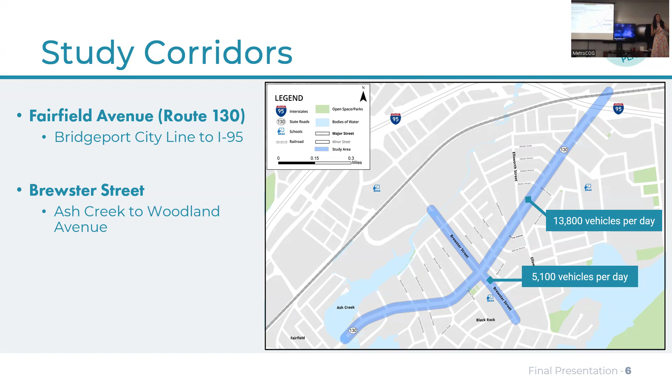So, community feedback: we had an online pin drop survey. I hope all of you had a chance to look at it. We got nearly 500 responses on the pin drop survey. Then at our second public engagement — actually our very first meeting — we took more comments and put them into the pin drop, which got us to 500 comments. But at our first official public meeting, at the very end of the slide deck, we had an activity with 6 boards up, different themes, and we gave you dots and said, go find your highest priorities.

We had 6 key concerns: pedestrian safety, managing speed, on-street parking conflicts, improving bus stops, dangerous turning to and from, and bicycle safety. So you'll notice none of those were like, let's just get you all to drive down this corridor faster. That was not an option. And that's good, because that's not what's going to happen.

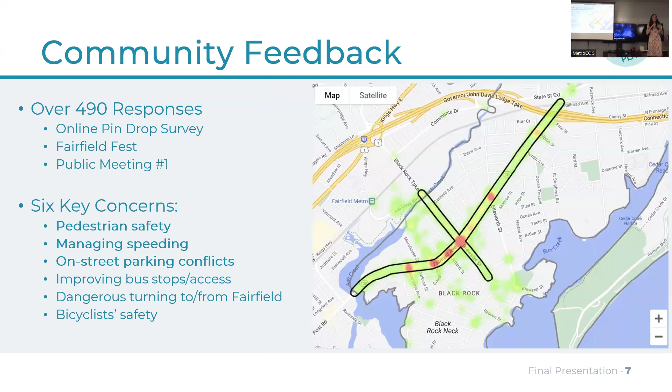The top 3, sorry, just really quick — the top 3 were pedestrian safety, managing speeds, and on-street parking conflicts. So those were the key focus going into these concepts.

Crash frequency, you know better than I do — this is just data, the crash frequency and the near misses that are not captured by this crash frequency. If the crash didn't happen, but it almost happened, it's not in this data. We know the corridor has had its safety problems in the past. There are 3 very high crash intersections — Brewster Street, Ellsworth, and Orland and Albion — which were also focus intersections for these concept plans.

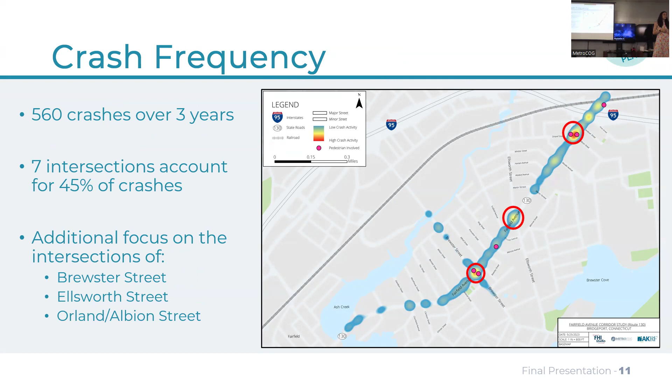So we kind of ended on this at the last meeting — the preliminary concepts and where they might fit, because we had, if you remember, 6 different cross sections, but we showed one, for instance, that didn't have on-street parking. What do you mean we're going to take out on-street parking? The goal was to take out on-street parking where it is least utilized or not utilized.

As we've received feedback that you need parking back in certain sections or it needs to modify, we've been trying to do that. I just heard of another section tonight, down by the bars, that may need that on-street parking that's currently not shown. Again, this is a plan that will be documented into the study that this needs to be accounted for. Potentially overnight parking demand needs to be accounted for.

The goal was never to remove parking everywhere. It was to remove parking where it's unsafe, right at the corners of intersections, and also where it's not used because the land use doesn't need on-street parking, or near Albion, where it's not even a parking lane, just a wide shoulder that encourages speeding. So taking that out, what can we do with that space?

That's where we got the streetscaping idea. So this was to lay out for you where we were going to do things and why we were going to do that.

Since this meeting, what you'll see finalized includes everything here, with the exception of the bike lane against the curb. That doesn't mean it can't happen—it's still included as an alternative in all our documentation. But with the bike lane on the curbside, we weren't able to put in as much parking and have turning lanes at intersections. Since we're going down to only one lane in either direction, those turning lanes are critical to keeping traffic flow moving. So the trade-off had to be that the bike lane couldn't be against the curb. When an engineer comes on board with a survey, they may be able to fit something in differently than we can from a high-level planning look, which is why it's not gone entirely—just one red line—but that's why it's not currently shown on these plans.

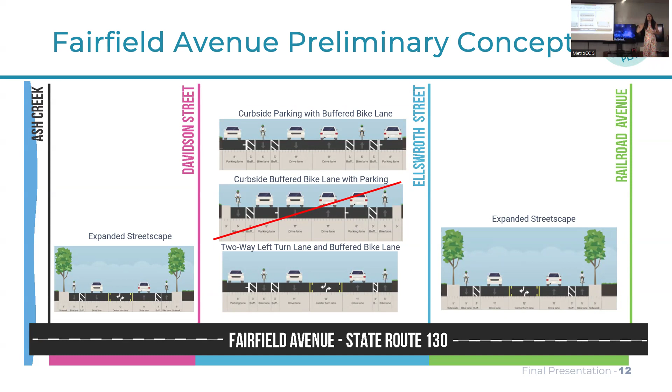Now, potential circulation changes. If you walk around, they're a little more discreet here. There's a whole section of our report dedicated to circulation changes, so if you're concerned about which road is one-way or two-way in the proposal, please look at the draft report online, and eventually the final, for a clear explanation. There are a couple major ones I want to point out.

It's a little hard to see here, but at Albion, Orland, and Burr, that intersection is very complicated. There are too many movements—we need to take movements away to make it safer. In this proposal, Albion would be one-way away, and you'd come out at the traffic light at Wordin. Burr would also have a roundabout way of getting back out and away from the intersection, to create fewer turning movements there.

There's a new circulation change since the last time we were in front of you. We had to make all the traffic signals work with current traffic demand, even though we're hoping fewer people will be cutting through in the future. This traffic light is now complex because it's skewed, and the other issue was that it was very difficult for a pedestrian because a left turn wouldn't see where the crosswalks were.

This is Wordin—Whittier is one way away, and Wordin is still two-way here. There is a traffic signal added to help with that flow so you can get out. But we needed to make this intersection less complex to make it safer, because the crosswalk wasn't visible with that skew.

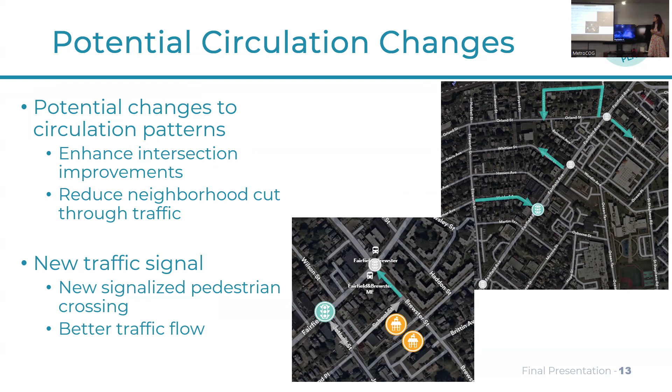So timeline since the last public engagement, I've done a lot of things. We refined our design concepts based on the comments we received. There are several blocks of parking that we've put back in, which I'll show you, meeting what you were asking for last time with specific comments on parking. And then we advanced these to the corridor concept you see here today to pursue as a source of future funding. I'll talk about the funding when we get to the end of the presentation.

So, the corridor concept plan and recommendations. Really quickly, did everyone get a chance to look at the boards a little more closely? Is there anyone who didn't get a chance? I'm not going to go through all of it, but I want to make sure everyone got a chance to see it a bit closer, since it's going to be blurry on the screen. So please, if you didn't have a chance, walk around.

So what are we doing? What are the key elements of it? Road diet - this is one of the key elements. So you have 4 lanes of traffic, and we are reducing to 2 lanes of traffic with turning lanes, either 2-way turning lanes or turning lanes at intersections.

Narrower travel lanes. There was a question about how we're going to reduce speed. We're going to reduce speed by narrowing the travel lanes so it doesn't feel as easy to drive on. On a highway, that travel lane might be 12+ feet wide - that's why you can drive that fast, because your margin of error, if you're not paying attention for a second, is you're still within your lane. The more we narrow it, the more you have to pay attention. So the travel lanes on all of these are 11 feet wide, notably narrower than most of your travel lanes today.

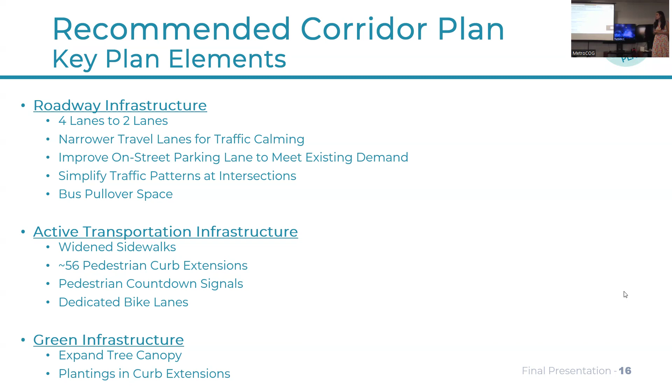So I'll just start at one end and work my way down. Starting at the Fairfield town border, this section was discussed a lot tonight, which is nice. Here there were opportunities to park that were either not signed or not utilized. We did a parking demand analysis, but it was during the day, during peak hours, during retail. What I've heard is that this is in a bar area and there are cars that park here. So right now what you're seeing is a streetscape that allows an expanded sidewalk and a tree canopy.

With a two-way turn lane, because there's a lot of curb cuts on this section of road. And if we don't let cars turning get out of the way, there's going to be a constant stop-and-go flow going down the corridor.

This is not, again, engineered and going into construction tomorrow. There's an opportunity to not expand the sidewalk in certain spaces if the community felt, once this got into design and did that public meeting, that the parking was of higher priority. But we're showing it here as to the potential to not need as much on-street parking, whether that's through other opportunities. The focus of this study is safety and pedestrian accommodations, and we wanted to show what was possible as far as a sidewalk extension and a walkable streetscape down this section of road.

There's bus pullovers, there's little bus symbols, it's a little bit better to see there. Expanded tree canopy and the two-way turn lane.

So the two-way turn lane is for all of those curb cuts. As I mentioned, there's a conversation of what prevents someone from using the two-way turn lane as a speeding throughput lane. The goal is that that doesn't really get you anywhere, because at any point someone is turning from the other direction and there's a lot of curb cuts. So we don't have a two-way turn lane going down this entire corridor. In most places, it's a dedicated left turn lane, but there are so many curb cuts here and enough opportunities to turn that it's really meant as a space to get people out of the way. And if it's used as such, it won't serve a purpose of bypassing.

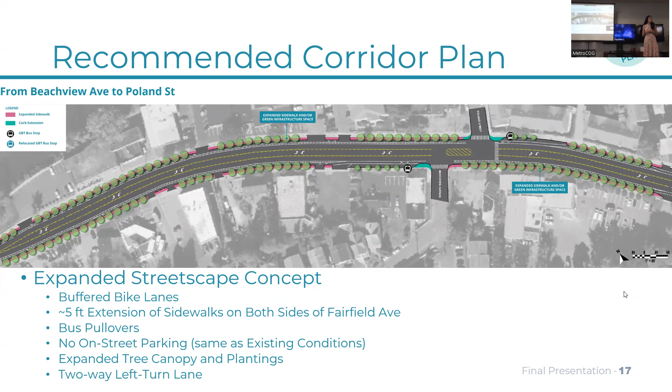And what's the timing on that, same as ours? I do not have the timing on that, or if they have received their funding. Yeah, they've gone - they finished their planning, they've gone through process design. Okay, fantastic.

So on the next section of corridor, starting at kind of the first traffic light we have on the corridor, it is similar. What I would largely want to point out here is that the curbside parking picks back up where there was curbside parking today. There was one section, for anyone at the last public meeting, in front of the U-Haul where there was originally not going to be proposed parking. We put the parking lane back in - we heard that it was regularly used and that our study just didn't capture that use.

So change the transition of that area a little bit, but it still maintains the bike lanes, and put that parking back in. Right now, wherever there is parking today, there is parking in this stretch of roadway, the exceptions being at corners. Right now your parking signs don't say don't park from here to corner. You have cars that go right up to the corner. That is not safe, you can't see pedestrians. So all of those spaces are inherently removed to provide this safe view, but that is the one space on either side at every single corner of every single intersection.

We've also shown you could stripe your parking lane. I got the question about the Ts and actually showing where the parking spaces are. You can do that, again this is just a visual. This isn't a final design - you could mark off the spaces or just have the one delineated lane. One of the things we did show, just to give you a visual, was all of the curb cuts. We showed striping that said do not park here, there is a curb cut. So that's what all these diagonal lines are, so that we would fit a car between them, but we'd just delineate to people you cannot park any closer than this to this driveway. People need to be able to get in and out.

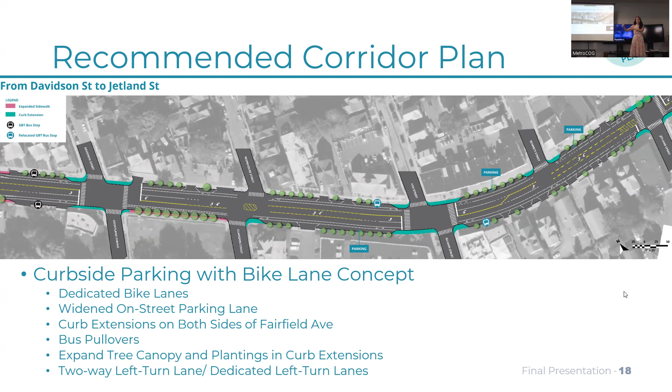You want to do the next one?

Okay, so the major changes here, and I talked about the circulation - Jetland Street is a fully signalized intersection now with the left turns occurring at Jetland onto School Street. There is no opportunity to make a left turn at Brewster Street.

I know you just recently got expanded curb extensions. These are much larger than what you have out there, so I know you have them and you're thinking is this just the same? No, because since we're taking lanes away, we're able to put that curb extension much further into the roadway. I want to show you a picture of that on this slide here.

So this has a better before and after snapshot of the corridor over here. We've got the rendering, but there isn't the before next to it. So if you're standing in the same space again, you can see the bump out right here, and it takes a little bit of a lane. This is basically an additional 7 or 8 feet just on this side of extension of curb. It would allow for plantings. You can see that even without the median - particularly some of your median has some beautifully planted trees, but a lot of your median also doesn't, it's just concrete that cars have been driving up on and deteriorating. So by putting a lot of planting on the sides, you can still have opportunities for green infrastructure even without a median.

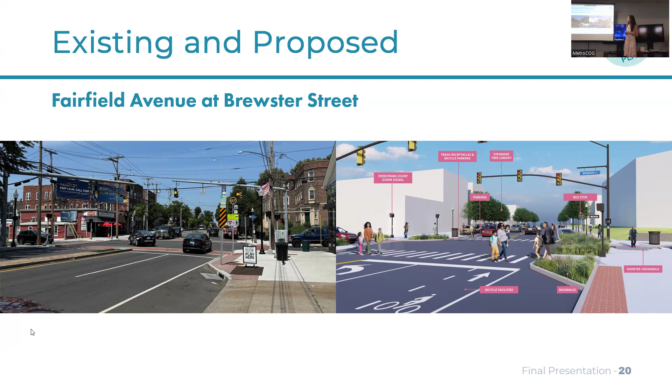And then just a larger view - especially on this screen it's a little harder to look at, but take a second to take in the whole picture from a safety standpoint. I got the question too, how do we make it safe, how do we guarantee it's safer? We can't guarantee anything, because I can never prevent someone who decided today was the day they wanted to drive 100 miles per hour. I can make it very, very difficult for them to do that, but I can't stop someone from doing it. What I can do, and what I've done in most of these sections - we've worked really hard to do - is shorten the pedestrian crossings as much as possible, limiting the time you'd be in a conflict zone with a vehicle. So all of these crosswalks are notably shorter than what is out there today, and they are fully striped out and very visible.

From Brewster to Ellsworth on Fairfield, there is no turning center lane. The goal is that these are more minor side streets, so we didn't want to provide places that could be used as a cut-through or bypass. A nice, fully protected bike lane, buffered as much as possible, all the way up to almost Ellsworth, where we have to put the turning lane back in.

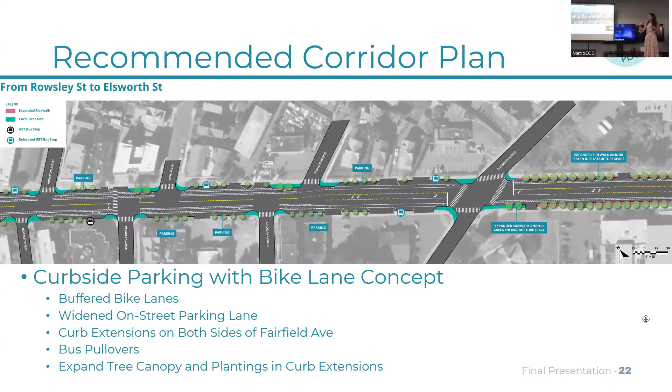Streetscaping. This is our one remaining mid-block crossing on the corridor. Lindsay, if you wouldn't mind going to the next slide, you can see what it would feel like to use that mid-block crossing versus what it feels like to use it today.

This is the existing mid-block crossing. I wanted to show both at the same time, but I should have made it bigger, because comparing the size of the person in each image, that crossing is very, very long today. It's all asphalt—you're crossing effectively 3 lanes: half of a parking lane that's not wide enough, 2 lanes, and another half a parking lane that's not wide enough.

Here we have just 2 lanes and the buffered bike lanes, so you do have to look for bicyclists first—bicycle, then 2 lanes of traffic, then bicycle again—and then full curb extensions, giving a huge amount of opportunity for planting, continuing paver strips, and putting in more street trees. So you get a nice canopy, but even here, that center median currently just has a square piece of grass in it, so you can replace a lot of this with green infrastructure—bioswale curb extensions and similar opportunities.

Marissa, can you explain the striping on the side of the bike lane, the buffer space? Yes, there are a couple places where it comes and goes. The buffer space is there so that if a parked car opens its door, the bicyclist isn't hit. Similarly, on the travel lane there's a buffer space between the vehicle and the bicyclist. We've put that in as many places as possible.

Someone also asked about something that actually prevents cars from getting into the bike lane. It's not ruled out—this isn't final design. It's written into the report that delineators or other materials could be used, and that needs to be explored as part of an engineering concept. We've laid the groundwork for someone to explore that further with the survey that shows where the water drains and all that information.

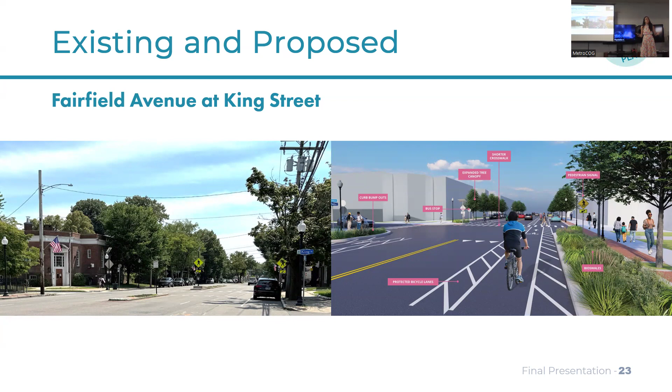And then another blow-up of the space too—the curb extensions making this crosswalk much shorter, with the same retroreflective signs as well.

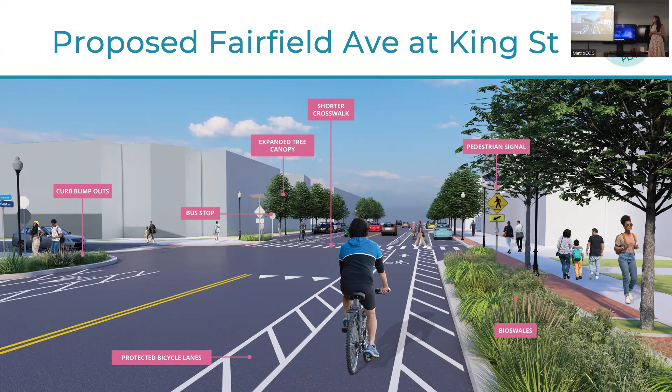From Ellsworth to Belmont Ave we really get back into streetscape, but this was another comment we got at the public hearing. There are places along Fairfield Avenue—the majority of the roadway from Ellsworth to Albion—that does not need on-street parking. There is a lot of off-street parking, but there are short blocks that do need it. A couple of houses don't have any form of driveway, and a couple of retail spaces utilize that parking.

This concept has been refined since the last public meeting to put back in any existing necessary on-street parking. So if someone had a driveway that could fit 3 cars and also had an on-street parking space in front of it, that was not considered a need. But if there was retail and that was their primary form of parking, it's still here. If there was not a driveway, there is still a parking space in front of or very closely adjacent to that property—so that was put back in.

Otherwise, we've expanded the sidewalk as much as possible, put in green infrastructure, and tried to show opportunities for plantings and 2-way turn lanes. I mentioned the circulation changes earlier, so I won't go through that again, but there are more evenly spaced traffic signals to improve traffic flow and create more opportunities for safe crossings on this section of roadway—particularly here, since a lot of the counselors told us at the very first meeting that they walk students from the schools over here. So, more safe pedestrian crossings.

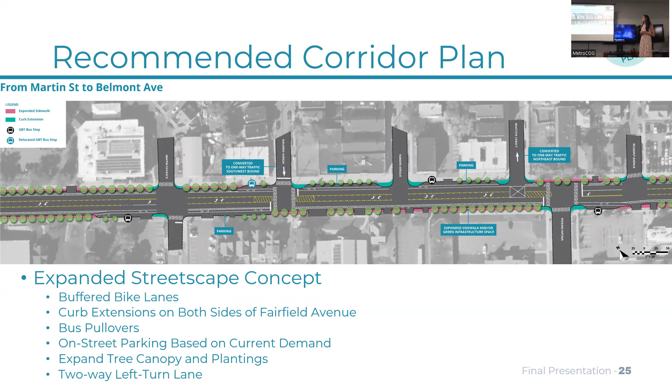And then finally, Wordin Avenue to Pine Street. At some point, this road diet, at least from our scope, has to end. It went to Railroad Avenue.

Connecticut DOT, and the primary traffic generator right now is that ramp coming off at Railroad Ave, has a lot of traffic on it. Going down to one lane right there will not allow enough people to get off that ramp. So the two lanes that exist today in either direction are carried up to Albion and Orland, which would be kind of the beginning of the entryway to this space.

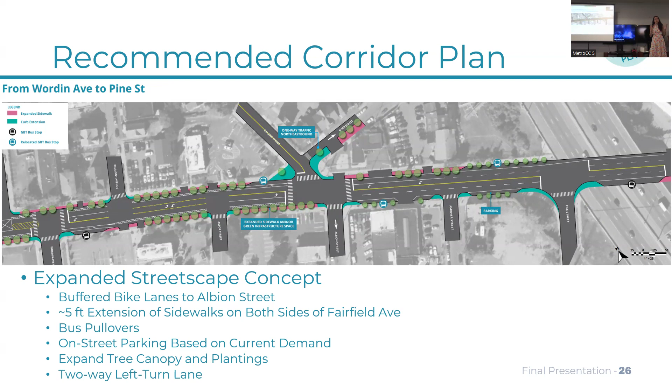And as such, we did everything we could to make that very complicated intersection smaller, tighter, and with more green infrastructure at it. With that, a little bit more of a bird's eye view.

And this one I really like in particular too, because there is a lot of confusing pavement. It's effectively two stepped intersections today. We are going to pull it down. We are going to shorten it. We are going to make all of the crossings dedicated, visible, notably shorter than what they are today.

I know there was a conversation about the median that exists today. The median is still crossing two lanes of traffic and it's only six feet wide when those cars are flying by you. Now you only need to cross two lanes, so you're done. You don't need a median because you're only crossing two lanes. So that's an opportunity for more green infrastructure.

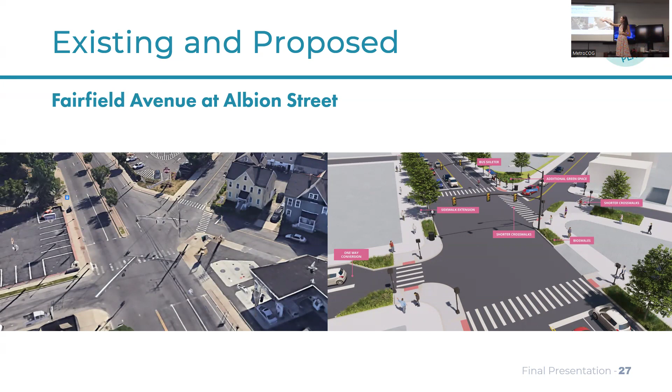And if you look at the one that will be a little bit easier to see - actually just go to the next slide, would you? Because it's bigger. Relocation of the bus stop to the far side of the intersection so it doesn't block traffic, and just showing the opportunities for a bus shelter, for a space to be.

This is a very utilized bus stop from our field observations, and we want to encourage people to be able to take transit, and have it be comfortable to take transit, and that's what we need to do. This whole corner also had all this green built out, took all that pavement away that was previously there, adjacent to the Wendy's, for the high speed turns that are occurring today.

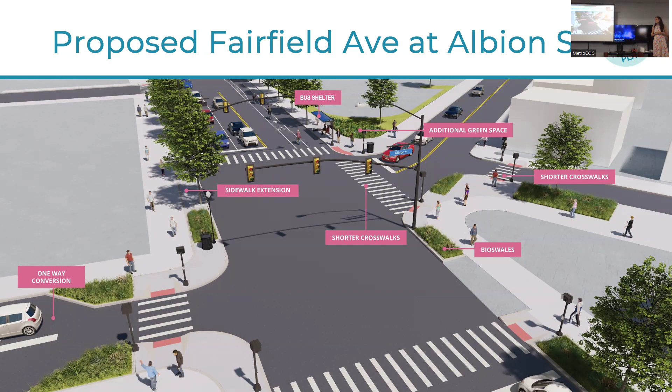What is it going to cost? This is what we think it's going to cost right now. It's a preliminary study, so we build a lot of contingency into this. I've heard of varying things, from that's so expensive to it's so cheap. There's a lot of differences in this.

But I will say that there is a similar corridor in downtown Stamford that they are doing this level of work on, in similarity, and their gauge on that one right now - which is a little bit further ahead than this one - is 25 million. This one is a little bit longer and a little bit more complicated at some of these larger intersections and circulation changes. This in total is right around $27 million.

The most expensive strip being from Railroad Avenue to Ellsworth, and that's because the sidewalk extensions take a lot of engineering work to extend sidewalk and change where stuff drains, but also all those intersections I showed you that were changing, like Albion and Orland, and that redoing of the intersection.

These are construction costs, so that does not include - a lot of people also noted there's no utilities shown on the plans. There's still an opportunity to bury the utility. It's not shown in the plans, but it works with the plans - the plans are designed around utility. But the cost of burying utility can oftentimes be prohibitive, and for right now we can't estimate what would be required to do that in a planning study, so it's excluded from this.

Engineering costs - that engineer that's going to come in and design this for a handful of years. Streetscaping - we showed you all the plantings, but as this isn't a detailed plan, I can't tell you exactly what the planting costs would be, depending on how you would want to go about doing it.

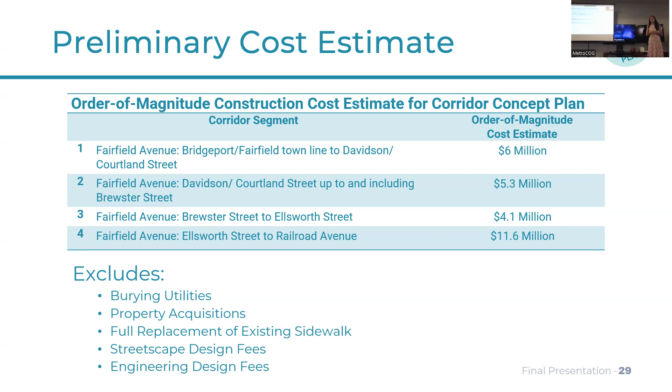An engineering design fee is generally 10%, not including survey, maybe 15%. So if construction is 30 million, you're looking at engineering of 3 to 5 million - it will not double the cost to have an engineer design. That helps a lot, thank you.

Implementation - there's a lot of 'I want this now and I want these pieces now.' One element of this is that the core background of this whole project is a road diet. We're going from 2 lanes to 1 lane in either direction. We can't do all those curb extensions, all that beautiful planting, until we're taking lanes away to put things into that old asphalt space. Until we take the lanes away, we can't put in the curb extensions at full size because they're going to take up half the road that's supposed to be a travel lane.

You basically have to do the road diet to get all of the other improvements if you're gonna do the plan as a whole. So you can't start with the little stuff and do the big stuff with a road diet - you also can't just do 2 blocks here, 2 blocks here, 2 blocks here. Think about it: I'm driving down this road, I've got 4 lanes, oh we all have to merge, I have 1 lane, okay now I've got 4 lanes and now I'm gonna go back to 1 lane. So you can't do that either.

So what are we proposing for implementation? We gave 2 basic options. You can do option 1, which is prioritizing the highest crash locations. In that situation you would start with Ellsworth Street and Railroad, which as you might remember was the most expensive section.

You would do that first and work your way down to the Fairfield line in order. That would also require the largest initial startup funds if you were going to do this in steps. I think the goal of this would be the implementation, and that's likely going to be what the engineer proposes as to how they're going to construct it. In the perfect world, you do all of the funding at one time, you design the entire stretch of road at one time.

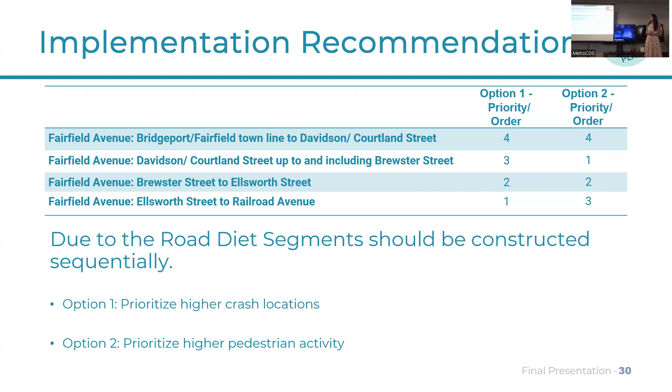Next steps: we are finalizing a report. There's a draft report online right now that went to Connecticut DOT for their feedback. We have some comments from them. As I mentioned, they do not change what we showed you, which is why we showed it to you - we're not going to remake the wheel.

We are finalizing their comments and the feedback we hear now to make sure that we list anything you bring up as possible opportunities in the future as much as possible into the report. That will go on the website as a final report. And then the city and stakeholders can utilize this final report to seek funding.

A lot of projects get funding with lesser studies or no studies at all, so you're in a great position to seek funding. And your stakeholders have all been involved in this process. The next step is advancing the corridor plan recommendation concepts into engineering, design, and construction.

So once the funding is secured - and I was talking to folks about this too - once the funding is secured, your next step is engineering, design, and construction. I was also asked how long, so I will generally say that a similar corridor that received a similar amount of funding in the downtown section is about to start. Its engineering design is currently projecting 3 to 4 years for design of the project.

It has to go through environmental considerations. Once you go into design, it's a long process with Connecticut DOT and their roadway and federal funding. It's a 4-year design process, and then it is multiple years of construction because the construction season is April to November. As you can imagine, this is a lot of work and they will not be able to do it in one season.

You might get one section per season because you do have a nice maintenance of traffic protection where you can step it in. But you're also probably looking at 2 to 3 years of construction in a perfect world. So with that, reasonably, from your start of funding, you're looking at anywhere from a 7 to 10 year process for the full build-out of something of this size.